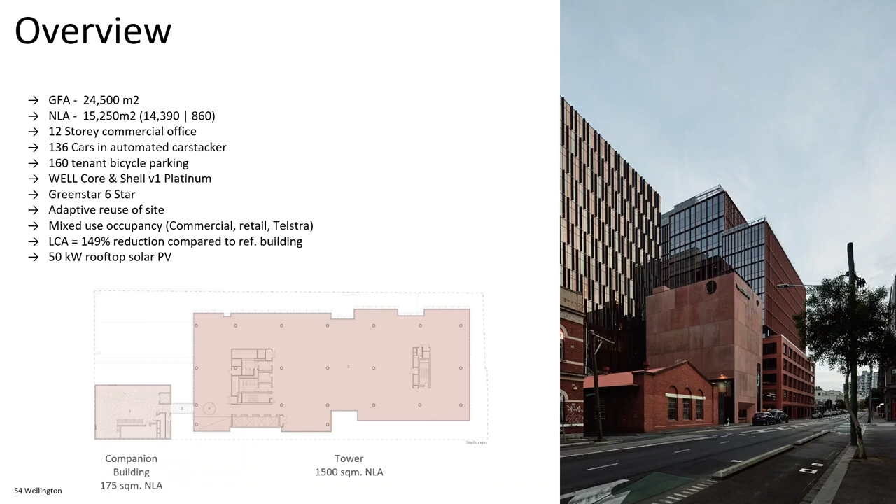Just a bit on partnerships. We think the stewardship and sustainability is really critical, especially on a commercial project of this size. Quite a tumultuous time, lots of things happening. There's a COVID bubble in the middle of that.

But what's important is the continuity and stewardship of the project, that the team, even though some of those organisations dropped off, kept going. So I think it's a good result, and probably the dedication of the team made it sustainable, but probably improved that sustainability thing.

It's also sustainability in 2015 when we started was, for us, a completely different mindset than where we're at now. So I think we perhaps weren't ambitious at the time, but that stretching of the time actually allowed sustainability to become bigger and better than what it was at the beginning.

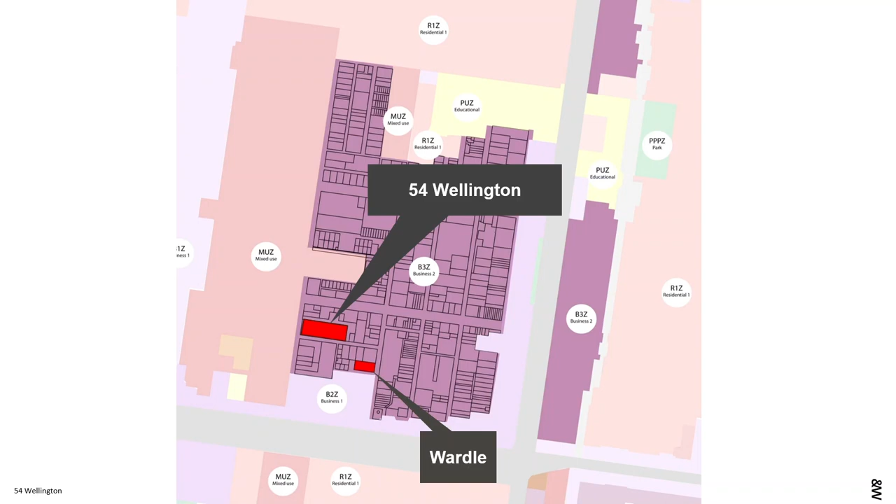It is in the heart of this commercial area and is very local for us. This is pretty much in our backyard. We're a block away. The Melbourne office for us is literally around the corner. So we watched over that period as the building went up.

This is really about transformation. So this area in Collingwood, and you'll probably see that JCB building later, has really just bloomed since that 2015 inception. And what makes it possible is Telstra, really.

This is probably a handshake dollar deal that was made to develop over Telstra with Grocon at the time, and that scale of development didn't really exist, but changed the neighbourhood from light industry and manufacturing to places where people work. So that side of Wellington is commercial, this side that the photo's taken on is residential. Quite a transformation happening in the area.

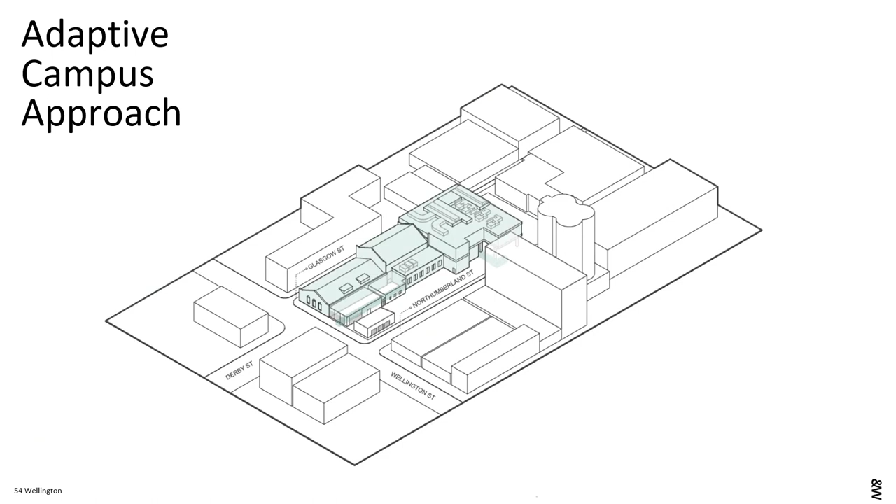We call this approach to the site development of the building the adaptive campus approach. So playing off the smaller 1-2 level scale of a lot of those existing buildings, the Telstra building that remained, but also working with the streets in Collingwood, which are very tight.

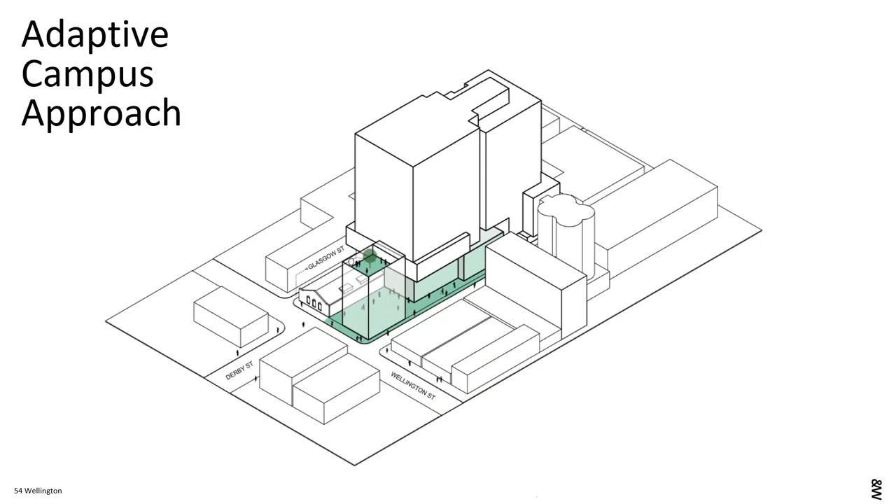They're almost laneway size and the footpaths are quite narrow. So how it hits the ground is really important, how it relates to that existing context, and how people engage in the ground plane is really critical.

So again, from that diagram to the end result, the Telstra single level brick building there. We've got the companion building that we've called the precast building, which faces Wellington and Northumberland, and then the tower is set back significantly off the street.

What we were given from day one was a really complex site with Telstra developing over 100 years, adding to it, just kind of Frankensteining the site. There was about 30% left to build.

So for a commercial project this size, really complex, and how we were going to land on top of this - this drove a lot of the sustainability and forced the approach from the ground, the structure, just the way that we had to engage with Telstra and those existing things.

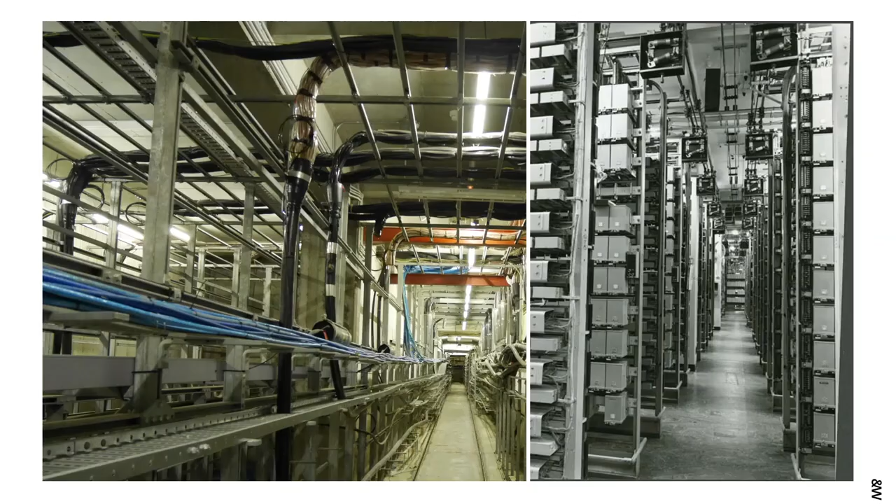What made it feasible was Telstra downsizing, so going from expanding size of tech to shrinking tech made the need for that land not necessary anymore. So that's what made it feasible.

What was there was lots of existing infrastructure, basically building over tunnels, and eventually coming to the conclusion that we would need to drop columns through Telstra. So the response had to be delicate, sensitive, and lightweight. That drove a lot of the material and structural systems that we had to employ to make this project work.

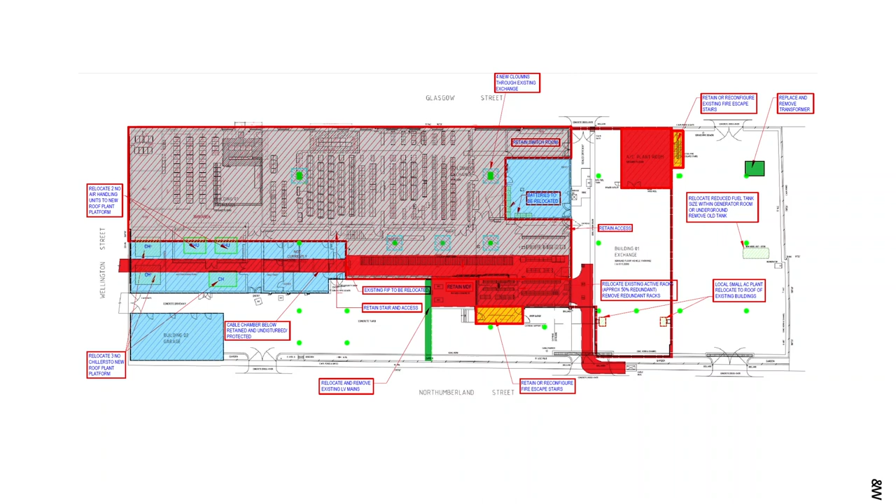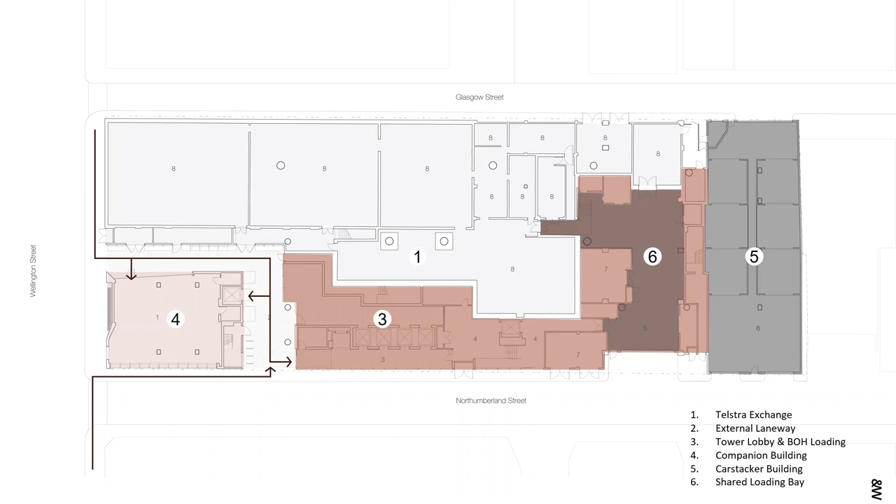The ground plane is difficult to disengage from what we were putting in with Telstra. So again, the companion building on the left with the laneway that connects entry to the companion building, entry to Telstra, entries to the tower itself. Car stacker on the right.

And so what you have is this very engaged ground plane. The structural gymnastics were quite complex, so dropping columns through Telstra, building a very lightweight but high spanning transfer podium to get the tower above it.

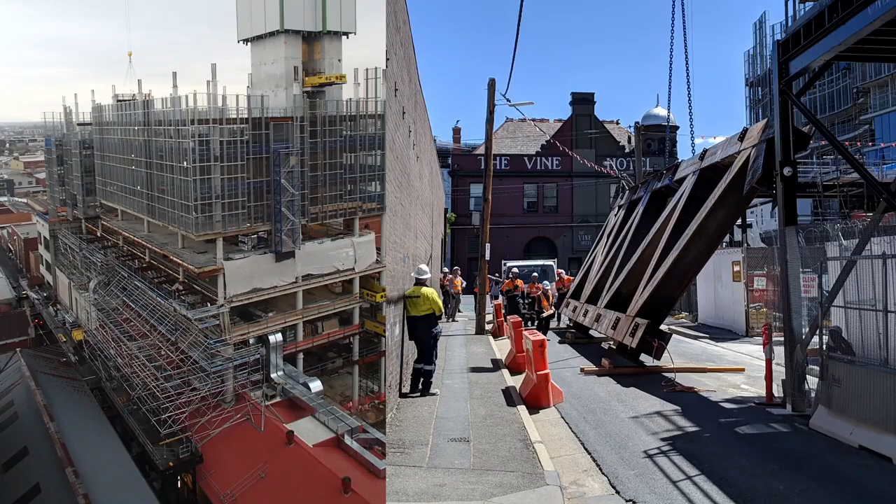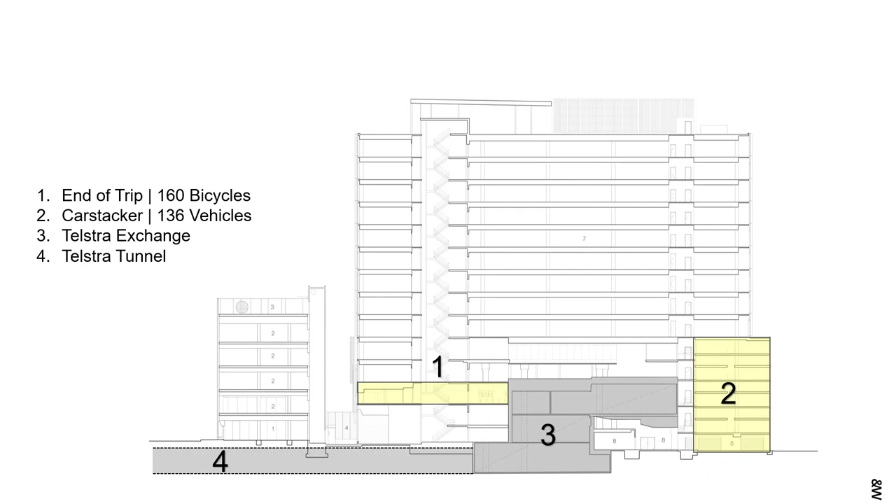Very complex. What it also meant is we had to build from the ground up, so no in-the-ground structure. So car parking is in this automated car stacker, which means it's very efficient, very compact, but also brought it to the street front.

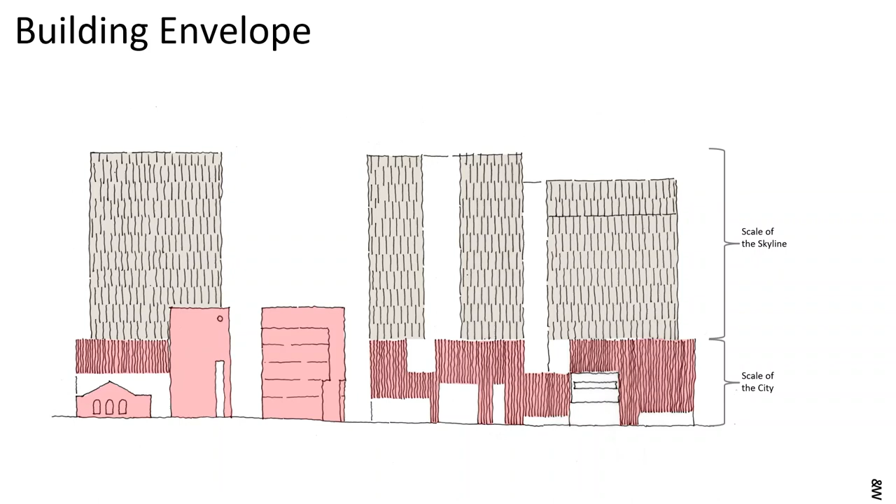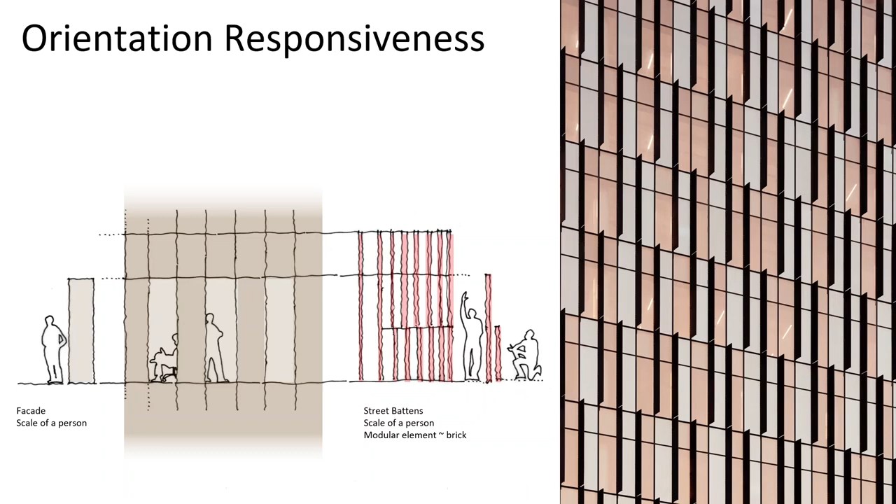The building envelope was quite an important piece of sustainability. There was a strategy of consolidating all that infrastructure and millwork on the ground, but also then creating a more efficient tower above that. So the strategy with the facade was to use a standard curtain wall system, but within that play with glazing and spandrel conditions.

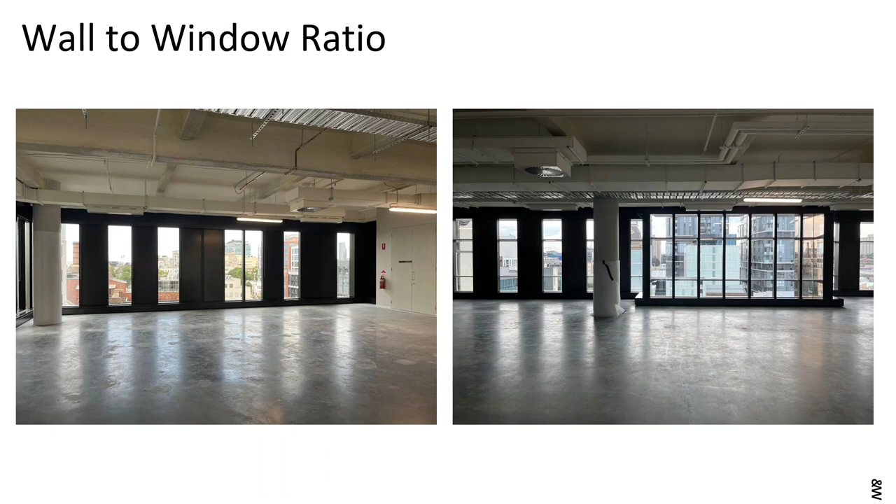So we've introduced orientation responsiveness, vertical spandrel panels that allow us to respond to the building - it's about a 60-40 wall to window ratio on average, but on the west the strategy allows us to really block out a lot of that western facing sun, for instance, but open it up on the north and south.

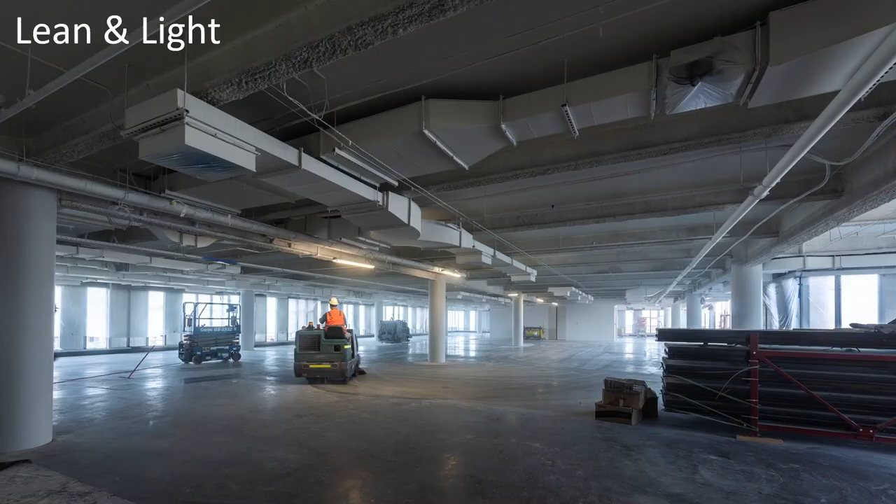Playing off the existing warehouse and industry, the companion building really exemplifies a kind of 10% exceptional, 90% really good. So we could focus a lot of attention on the companion building - operable windows where we couldn't get it on the tower, very light and lean, hybrid CLT structure.